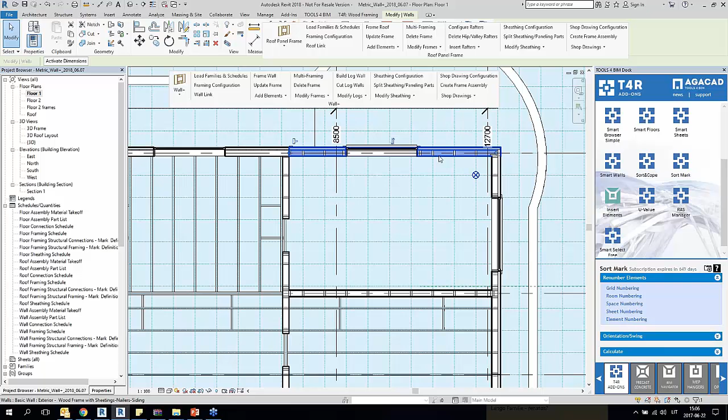Project Base Point handles positioning in a more robust manner than before. In addition to defining the spacing between studs, you also define the same value for the grid spacing, and the function takes care of the rest.

So as you can see right here, I have turned on my work plane visibility, because then it's more clear for me where the studs should be placed, because I can see the grid, and also I have placed my project base point in the intersection of the grid.

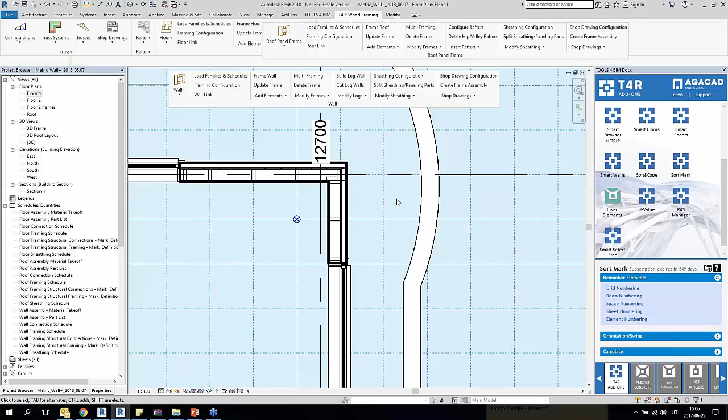Yes, and right now I will show you the configuration for the walls. So right here, as you can see, we have a feature aligned with project base point. So I have it turned off right now.

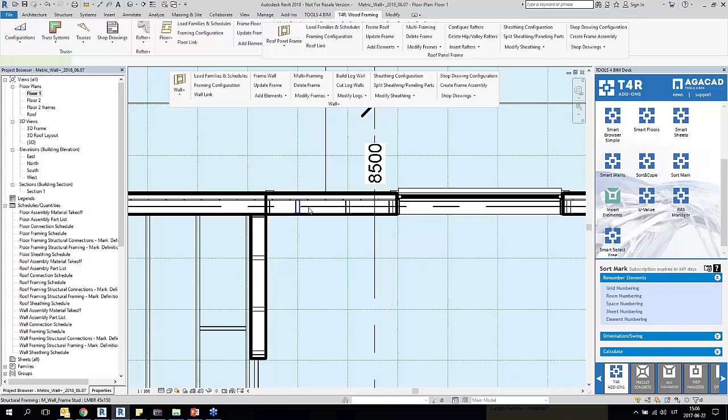So all my wall frames will be aligned by the project base point. The same goes for the floor panels and the roof panels. Yes, so now as you can see, all these framed walls have studs aligned by the project base point in all project.

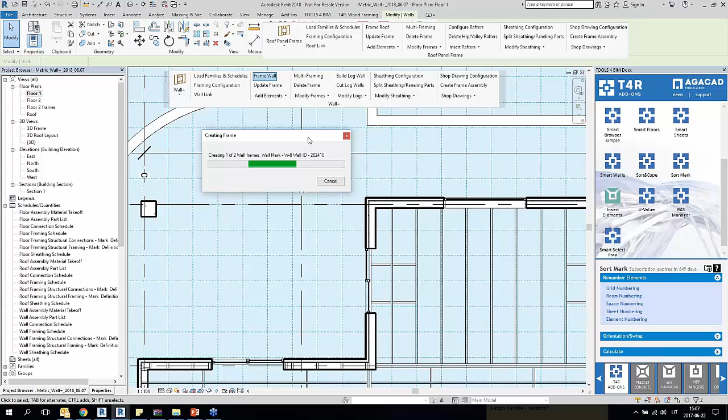So now, for example, I will frame these two walls, and now the tool is adding the main frame by our created configuration, and also you'll see how the studs will be aligned by the project base point.

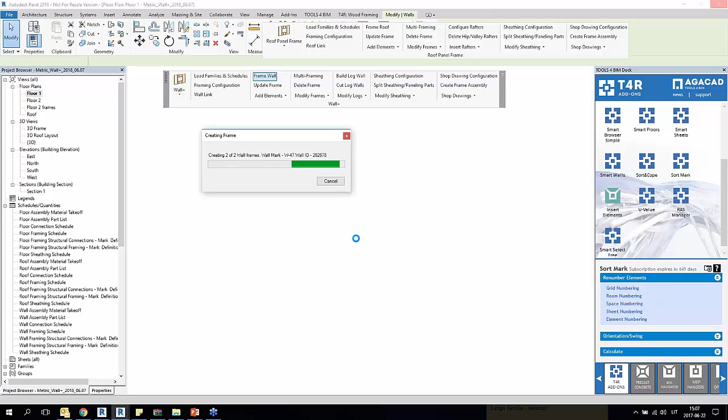Yes, okay, and I can see that the studs are added, and as you can see, all of these studs are aligned by the project base point. And I can just take a look at the 3D view as well.

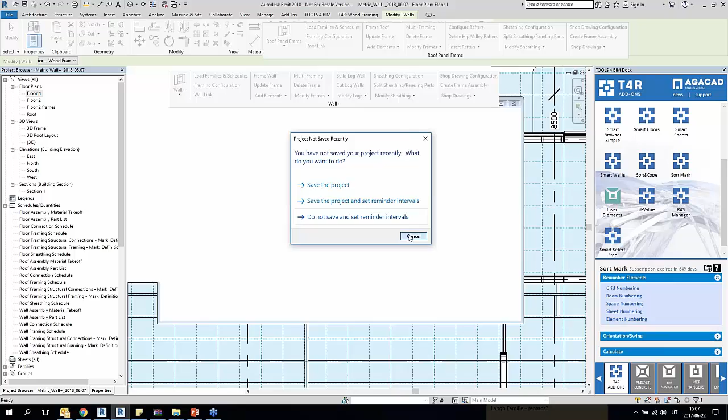Yes, and I just framed these two walls. I added the main frame, and everything is correct.

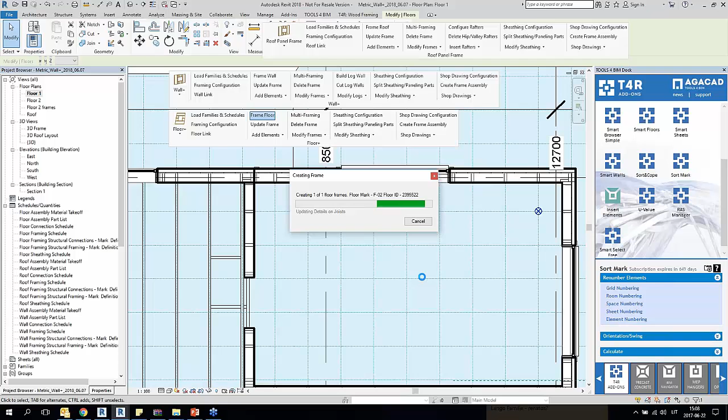Also, I can do the same for my floors. So I will take my floor framing tool, and for example, I will select this floor panel and I will frame it, and you will see how the floor joists will be aligned by the project base point as well. And yeah, they're aligned, and all other walls in my project are aligned as well.

And the same goes for the roof. Yes, I have one empty panel of my roof right here, but before framing this roof panel, I want to mention that this roof was split using our tool, roof panel layout. Yes, here is a 3D view created for that.

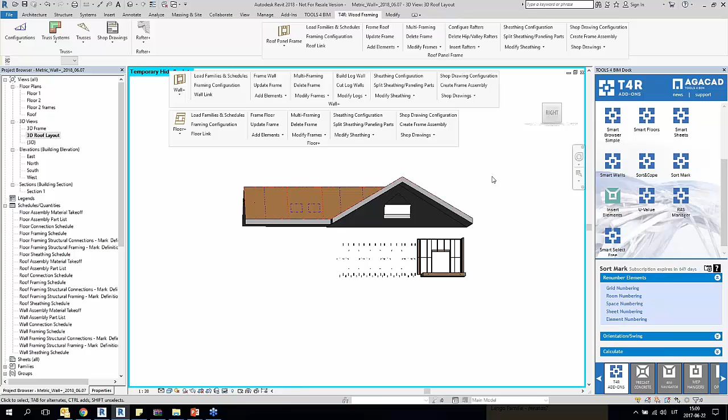I will isolate these elements. Roof panel layout automatically generates panel layout planning for any architectural roof. It uses predefined rules to draw symbolic lines indicating the future panels, and then it creates real roof panels. These roof panels can later be framed using the wood framing prefabricated roof tool.

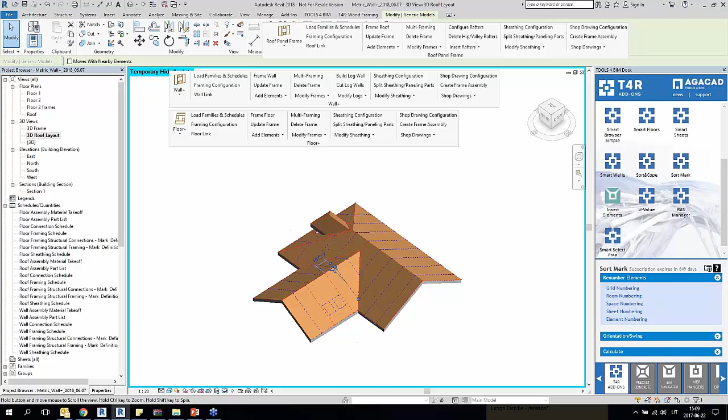So now I will go to my frame view, and as you can see, this roof was split into actual roof panels by roof panel layout, and now we can frame these panels. So I will take my roof panel frame tool, and I will frame this roof panel, and you'll be able to see that the joists will be also aligned with the project base point.

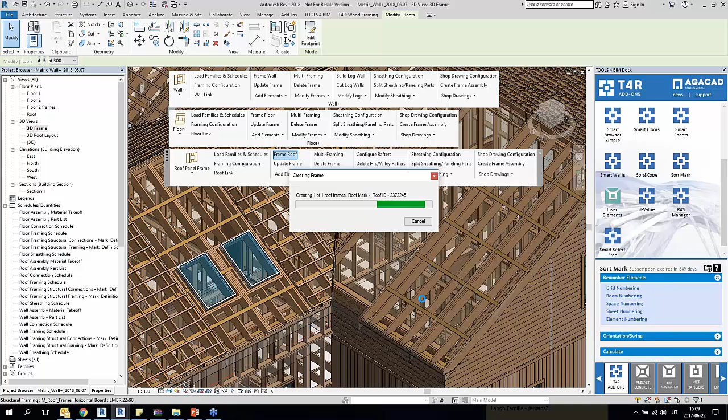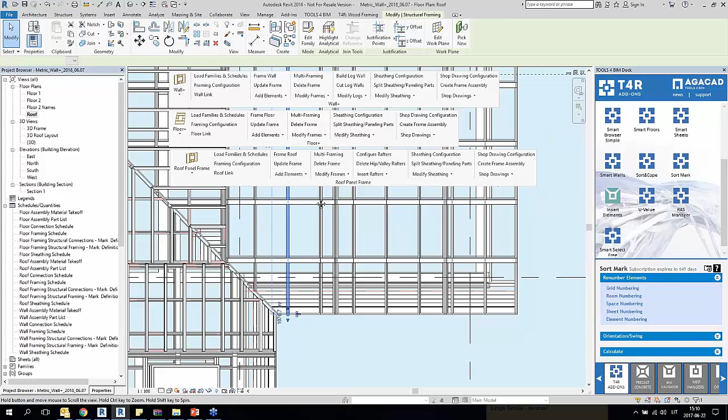Okay, my roof panel was framed, and I will go to the roof plan view, and this is the panel that I've just framed. As you can see, the joists are aligned with the project base point, as well as all other roof joists that have been framed previously - all of them are aligned with the project base point.

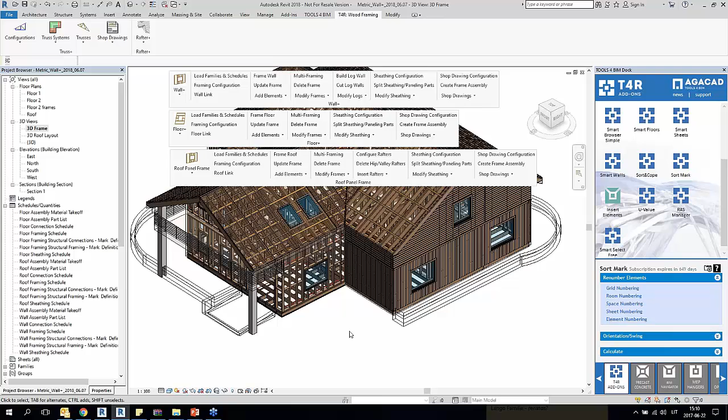I will go back to my 3D view, and let's talk about custom headers now, sill plates and top plate supports.

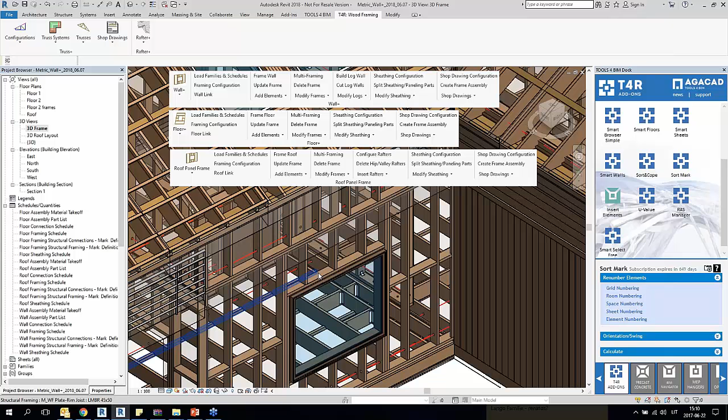Previously, you had to choose from our pre-created headers. But from now on, you can create any type of header, sill, or top plate support and save it under its own name for future projects. Your custom configurations can also be shared with your colleagues. So now, let's take a look at those configurations.

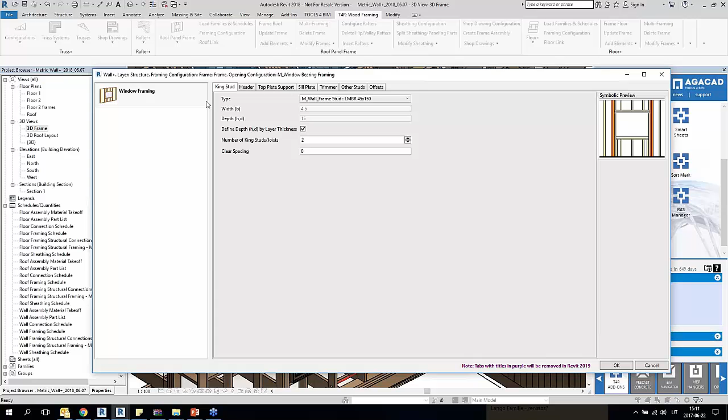I will go to modify frames and go to modify opening framing, and I will modify a header above this opening. So I can see right here that I can choose from the most popular types that have already been created - they come together with the software - but from now on you can create your own.

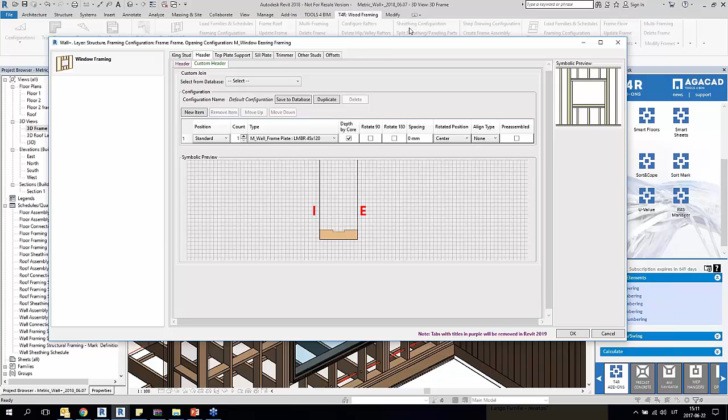You have to choose custom header type right here and then go to the custom header tab. And right here you can create your own configurations, save it with your own name, and use them later as well. So let's say that I want to modify this header, and yeah, this dialog conveniently lets you predefine each plate type and its position.

A plate can be rotated by 90 or 180 degrees and added to the external, internal, or middle wall layer. Additionally, there is a feature which allows a plate to be aligned with the previous element, but we cannot see it right here, so I'll just, for example, turn on some kind of default configuration.

Yes, so for example, this plate, as you can see, we can align it to the previous element, end, or start. You may select a specific type with predefined sizes from the project, or you may define the depth by the layer thickness. Your predefined scheme can be seen in the symbolic preview.

So for example, now I will try to create a new header type from this default configuration that again comes together with the software. So I will duplicate it and I will create my own unique name - for example, default configuration - and I will add, let's say, 5 elements.

So I will just name it 5 for now. Okay, and now let's say I will add 2 of these elements. Yes, I will not change anything at all right here.

And for this one, yes, I will add a new item, and I will say that its depth should be defined by the core. Also, I want to rotate it by 90 degrees and 180 degrees. I want to add it to the external side of the wall, and also I do not want to align it to the previous element's end.

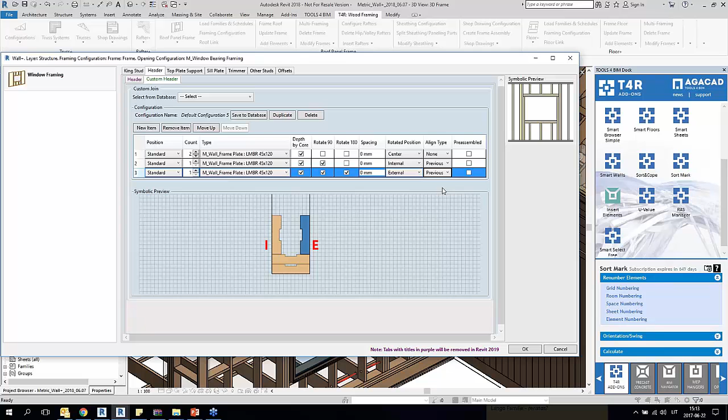Yes, I want to align it to the previous element start, so I will select this one, and I will add another element. Yes, again, I will define it by the core, and I will rotate it by 180 degrees, and that's about it. I'm happy with my header.

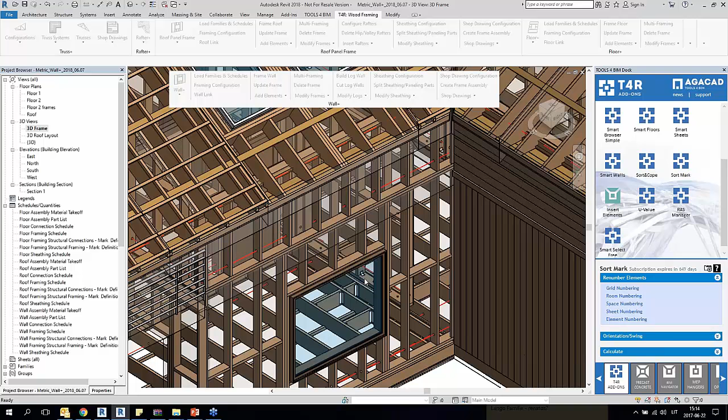I will save it. Okay, and I will use it, and now the software is updating this header above this opening, and I can see that the header was created. Yes, and my custom header type was added.

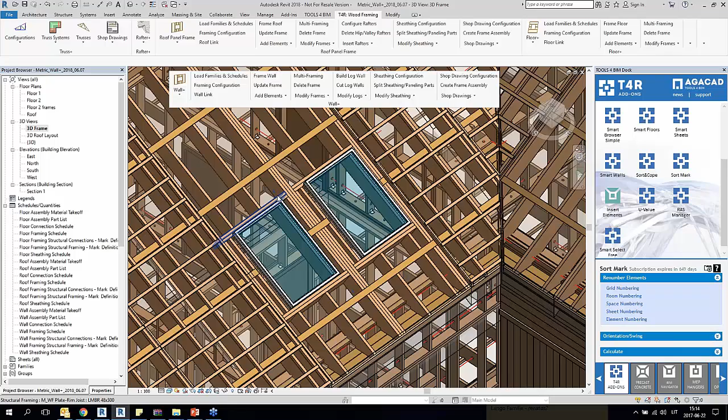And the same goes for the floor or roof openings, headers, sill plates, and top plate support. So for example, again, I can modify a header above a roof opening. So again, I will go to modify opening framing.

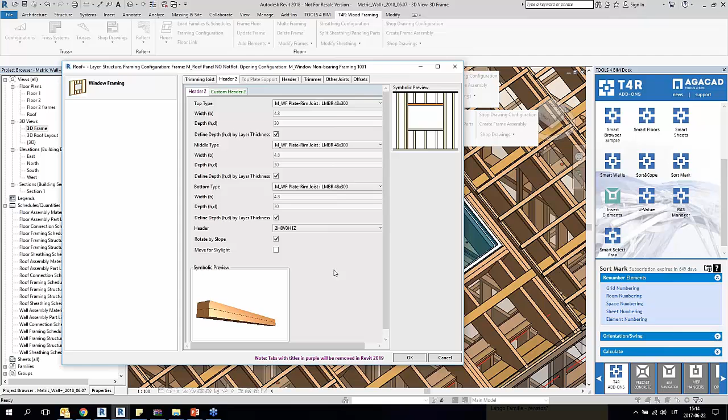Yes, I will click on this header, go to the header 2, second header, and also I will choose custom header type, go to my custom header type. I will turn on the default configuration for a quick start.

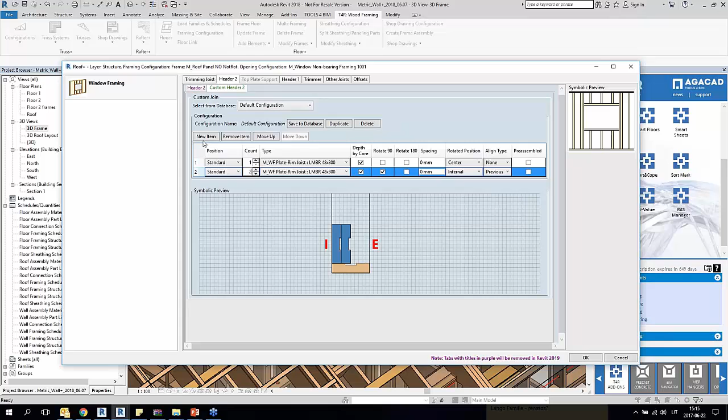I will add 2 of these elements, and I will add another element. I will define it by the core. I will rotate it by 180 degrees, and let's say that's it. Let's say I'm happy with my header. So I will hit OK, and the tool will update the header above this opening.

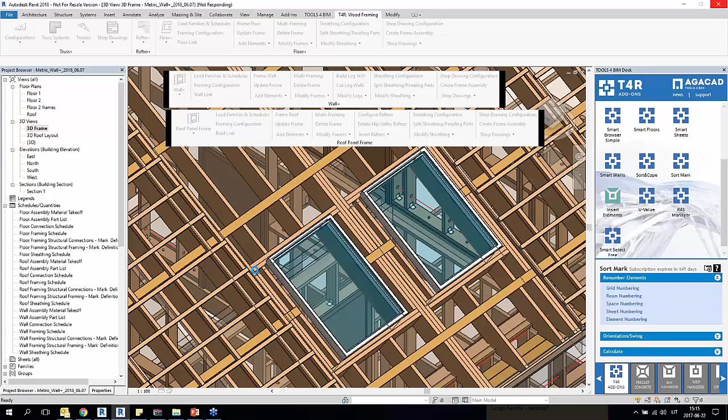And as you can see, the header was updated. It's very easy. Okay, and also more flexible options to control additional bridging, nogging, and blocking have been added.

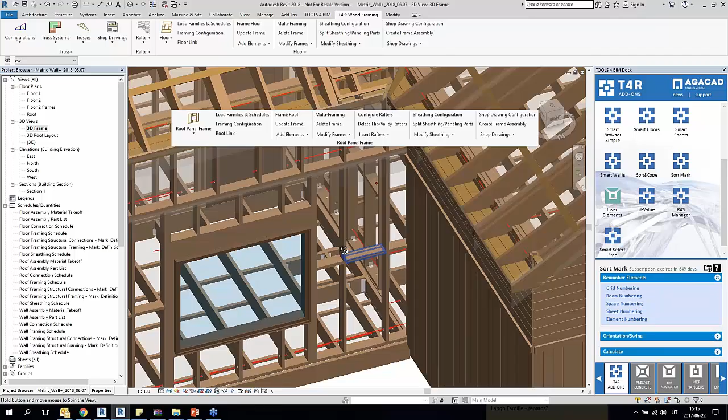So now you can predefine an offset from the selected element or a connected element. For example, I will add additional elements from the shorter connected elements end, and I will use add additional bridging, nogging, and blocking. I will select this element and this element.

Okay, and let's say I will add from the shorter connected elements end, I will offset from the top by 400, and the second element will be offset by 800. Yes, and I will add 2 elements, and that's about it.

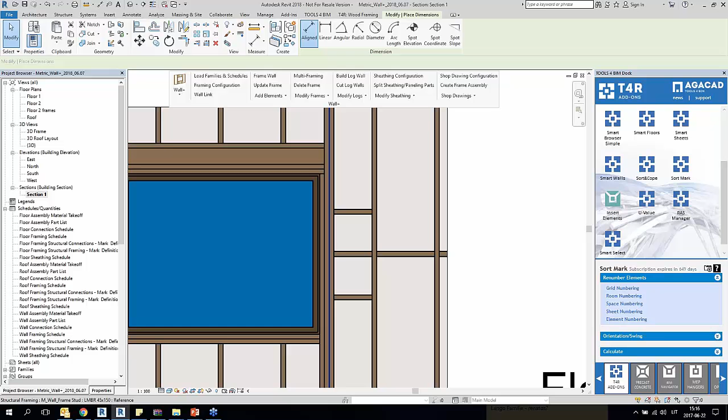Okay, and now the tool is adding the additional bridging, nogging, and blocking by my selected rules. Okay, and I can see that it was added. And also I created a section view for this wall, so we could see it better. Yes, and these are my additional elements that I've just added, and I can check that. Yes, I can see. Yes.

From this element top—no, from the first element top. Yeah, 400, and from the second one it's 800. So they were added by my created rules. I will turn on the continuous style. Yes, 400 and 800.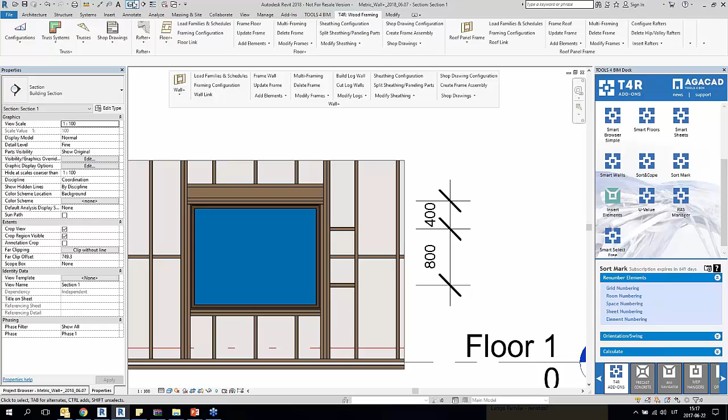I will go back to the 3D view, and of course additional elements can also be added for the floor and for the roof. Okay, now let's talk about the details.

From now on, rules for details are separate from the frame configuration, giving you much more flexibility. Previously, you had to predefine detail distribution rules for each and every frame configuration one by one, even if they were identical. Also, you couldn't make multiple detail configurations for one wall type, and luckily that has now changed.

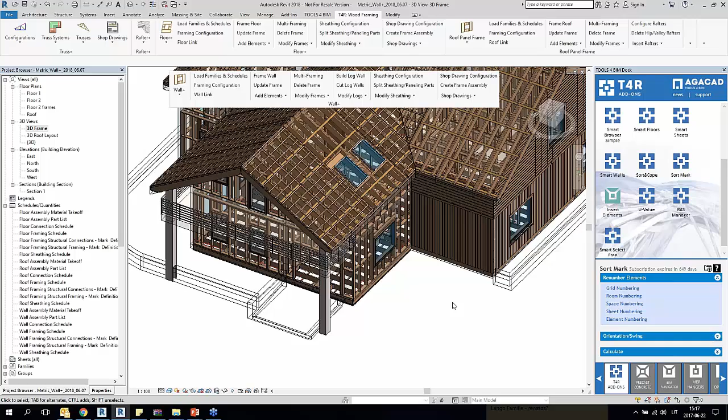So let's take a look at the configurations. From now on, they can be found in Add Elements, Details, Configurations. So from now on, these configurations are right here, and the best workflow is to add them later after you frame the wall.

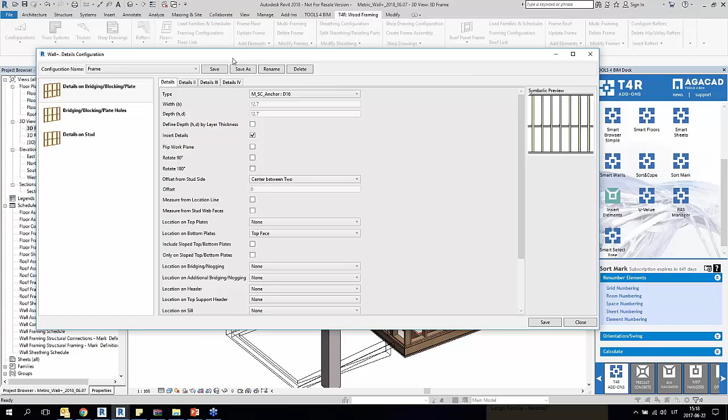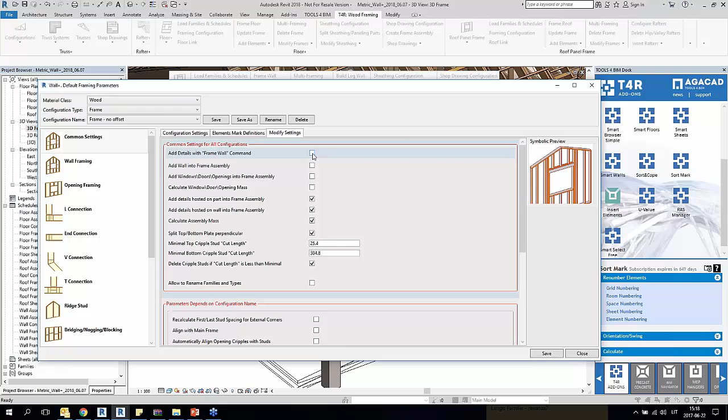But of course, if you want to add the details when you frame the wall, like before, in the framing configuration, in the modify settings, you have to turn on this tick mark, add details with frame wall command, so it's still possible, and the tool will choose the detail configuration that name is identical to the framing configuration name. So if you want to add it, you can still add it when you frame the wall, but we recommend to add them later.

So now I will add the details. So let's say that for this wall type, I have 2 identical wall types, but for this wall, in the first floor, I want to add details by one configuration, and for this wall, I want to add details by another configuration. So I will use...

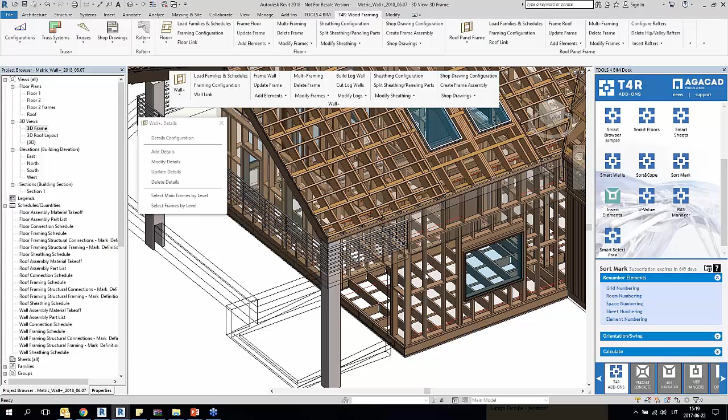So I will use command add details. I will select this frame. Yes, and I will use this configuration that I've created for this frame.

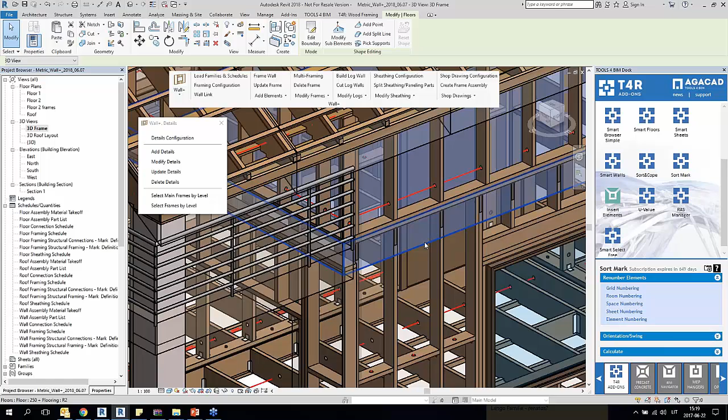Yes, but you know what? I just noticed that I haven't added an offset for this frame. Modify wall framing - I will just take a look. Yes, modify settings.

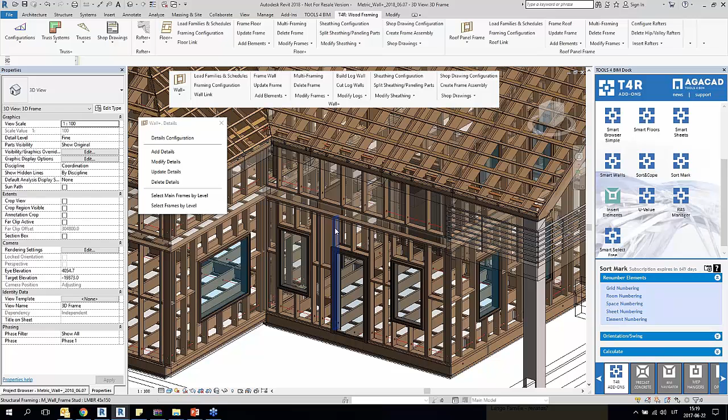Maybe I will add it to this wall right now. So I will add details by this configuration.

Yes, I created different configurations for top plate details, and I used Simpson details for this example. So these details were added to this wall, and I will add a different detail configuration for my wall on the second floor. As you can see, different details were added.

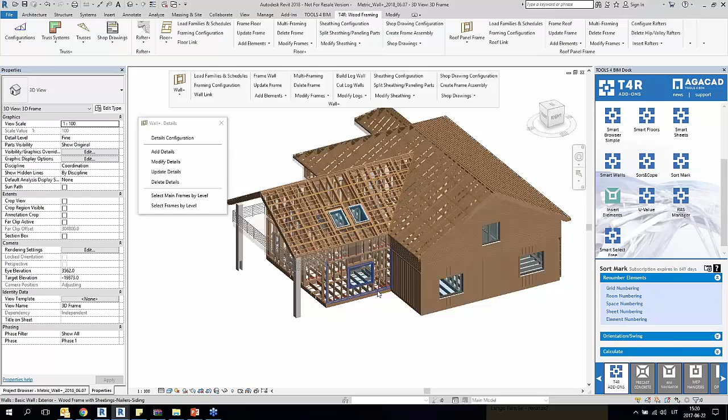Okay, and now I can add additional layers to my wall. So we can add secondary frame, we can add nailers, siding, or we can just add all additional layers at one time. But for now, I will just add them one by one. So I will add the nailers to this wall.

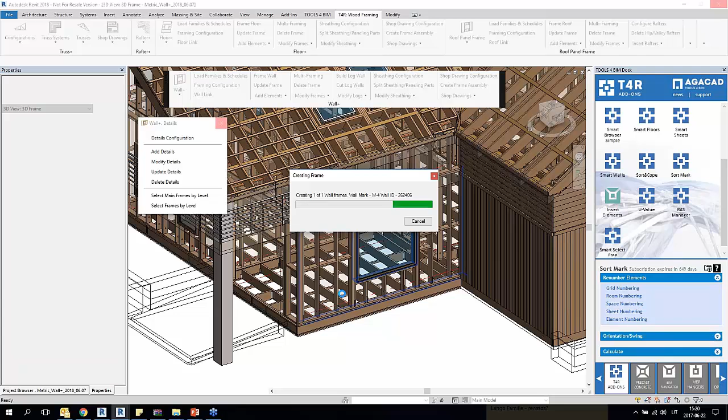Yes, and now the tool is adding horizontal nailers by the configuration. The horizontal nailers are added, and also I will split the sheathing and paneling parts.

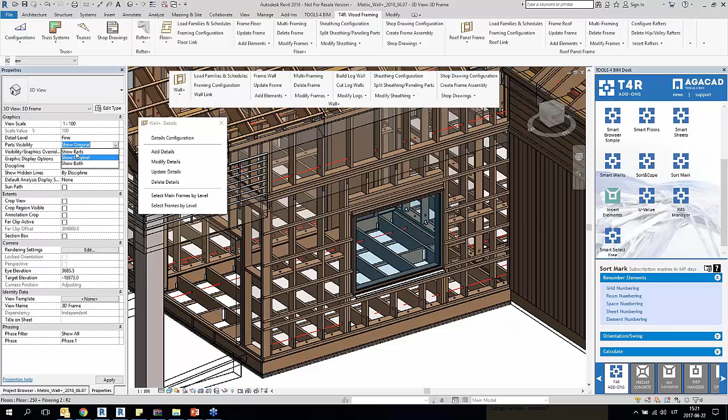In order to see the sheathing, I will have to turn on the Show Parts view in Revit, because sheathing is created as Revit parts. Yes, and I can see the sheathing was split in my wall panel.

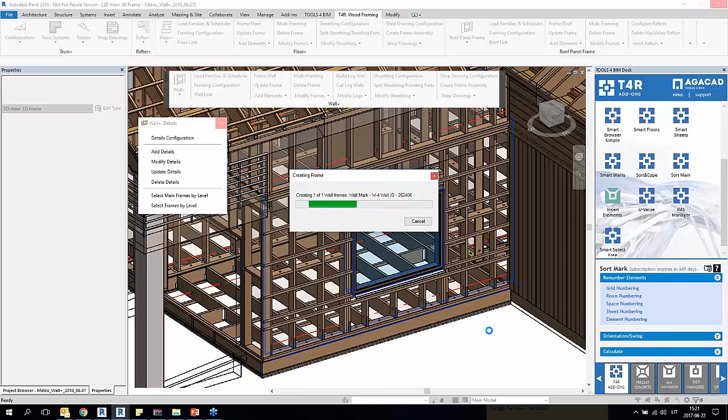So I will go back to the original view now, and I will, let's say, add the siding. Okay, the tool is adding the siding, and then I will sort those structural framing elements.

I will use the function Sort Structural Framing by Wall Mark, and all of those marks will be written in the framing members families.

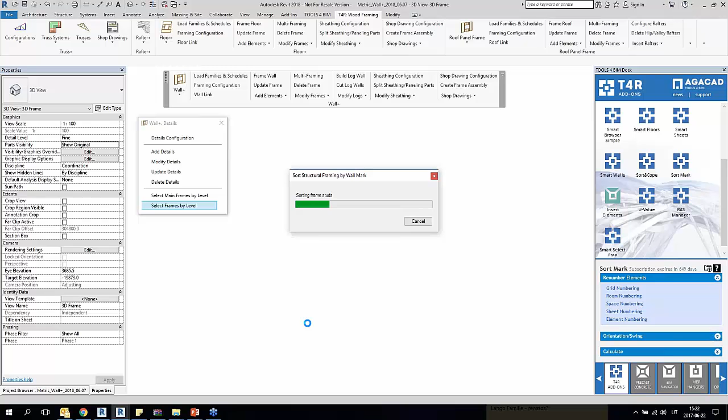Okay, so I can, for example, select this element, and I can see that it was marked automatically. Okay.

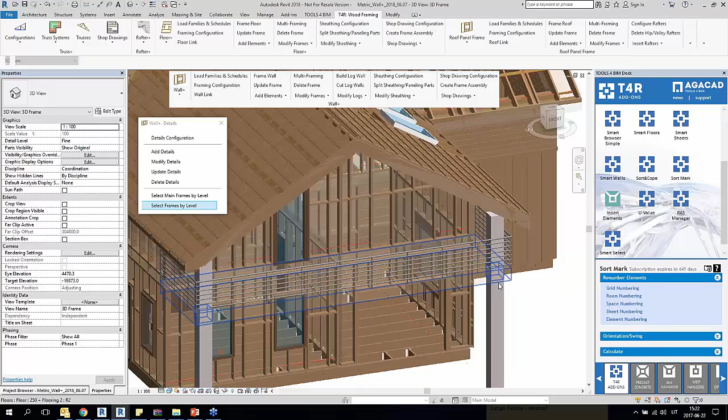And now we can start to create shop drawings. New features for creating shop drawings were also added to the new framing software. Shop drawings are created automatically by predefined rules in the shop drawing configuration. So I will go to the shop drawing configuration. And this is my configuration.

An option to insert a gravity point was added to the wood framing software. You just have to tick the insert gravity point mark right here, and also you can check in which views the gravity point will be visible. In this example, I checked the elevation frame front view and the detail view's frame front view. So we will be able to see the gravity point when we create the assembly.

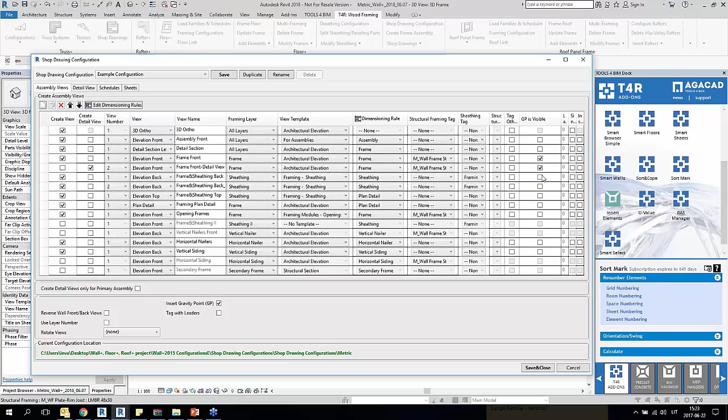Another feature, view number, was added to the new framing software, so finally we'll be able to create several identical assembly views. That means you can use the same view template for, let's say, 2 frame front views

or sections, and then add different dimensions to them. In the past, the views had to be different, so you had to, for example, duplicate view templates in order for them to have distinct names. Thanks to the view number column, however, views can be identical - all you need to do is number them.

So for this example, I created two elevation back views that are identical, and 2 elevation front views, but in this elevation front view, one is also the detail view. For the elevation back views, these 2 views are identical completely, except that I will use a different dimensioning rule - for one I will use the sheathing rule, and for the other the frame dimensioning rule.

And also we can create detail views. When laying out shop drawings, users can now display not only simple assembly views but can create detail views of an assembly. With a simple assembly view, you can see only the assembly itself in isolation from other parts it interacts with. Detail views let you see how a given assembly relates to walls, floors, elevations, grids, etc.

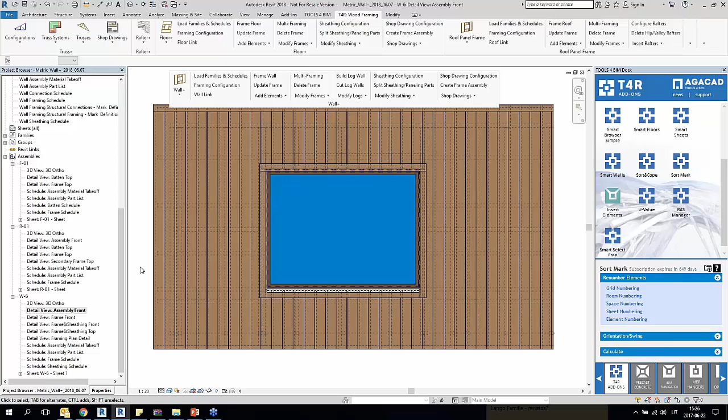From now on, you'll also be able to add customizable complex dimensions with completely new dimensioning technology: smart dimensions. Although in the past you could also add dimensions to shop drawings automatically, with new smart dimensions technology you can configure them from the simplest variations, where dimensions will be added only to a predefined layer, to more complex variations where all layers will be dimensioned.

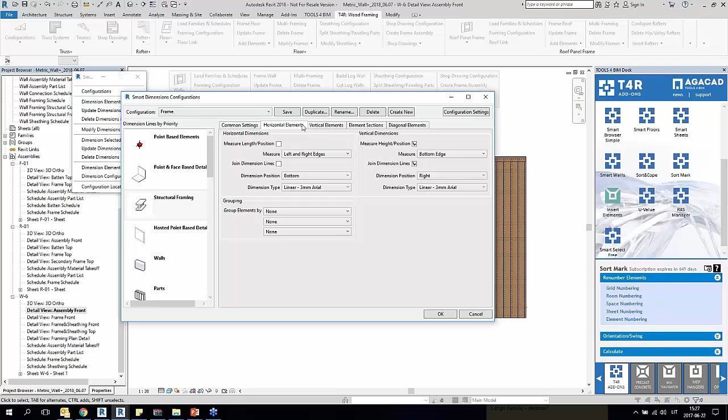With smart dimensions, you'll be able to automatically dimension structural framing elements, point-based elements, parts, columns, walls, floors, grids, ducts, pipes, and much more. All you have to do is predefine the rules in the configuration, which can be saved and used in later projects. Here I have configurations for structural framing elements - this is the frame configuration for horizontal, vertical elements, and so on.

I just opened a wall assembly view, and the whole process is straightforward and user-friendly, as you don't have to set all dimensioning rules in the configuration and create the assembly in order to see the final result. Instead, you can use dimension elements in view function, and the dimensions will be added by chosen configuration.

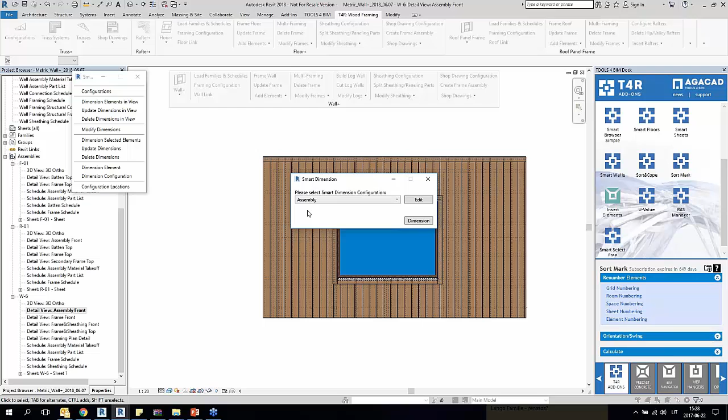So for example, here I will add assembly configuration. I will dimension it, and then if you feel the need to make any changes, just use modify dimensions. Do this until you reach the desired result, and all future views will be dimensioned according to your modified configuration, as all changes are saved.

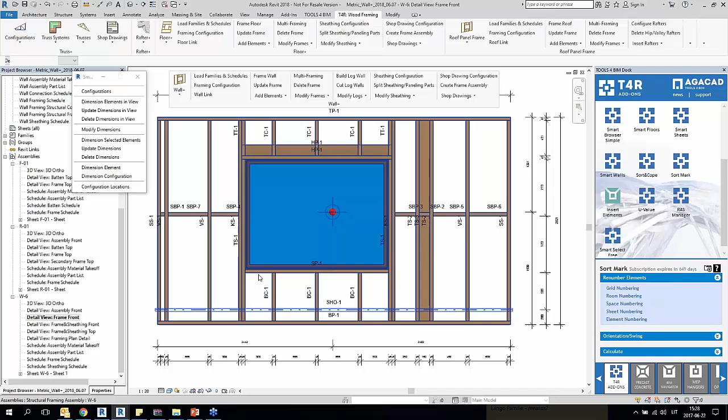Now I will go to the frame front view. I will delete these dimensions in view, and I can dimension these elements in view, choosing configuration frame, for example, and dimension this view. Again, I can modify it right now.

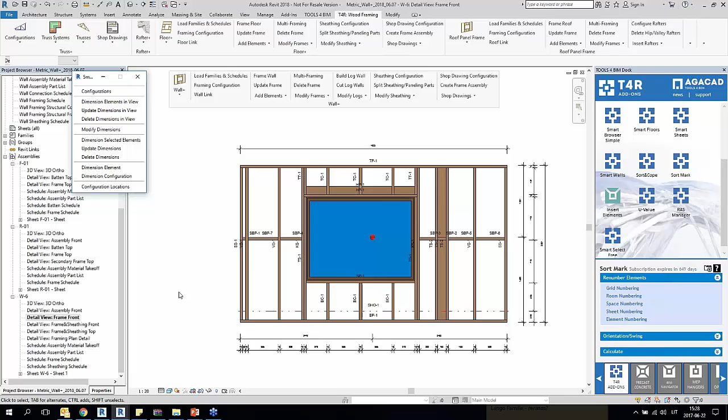But for now I will go to the frame and sheathing front view, and let's say I will also dimension these elements, and this time I will use sheathing configuration. And the view will be dimensioned by this configuration - as you can see, it's dimensioned.

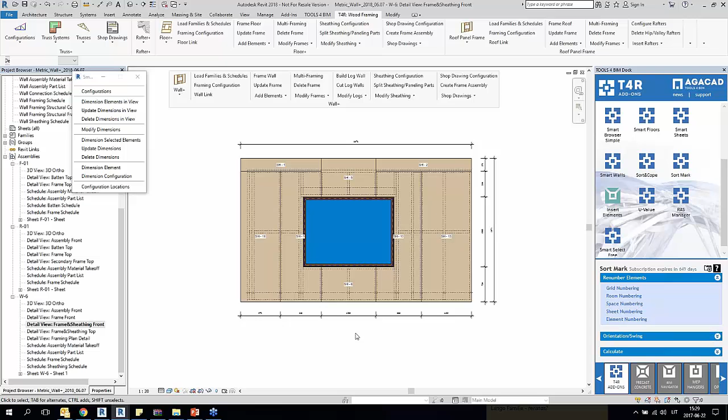Okay, so now let's say that I've modified my dimensions and I want to create a new assembly with these modified dimensions. So in the shop drawing configuration, I have to set these rules. Here we have a column with dimensioning rule, and here I have to set the rule.

So for these two identical walls that I've created, using different view numbers, I will use sheathing for one of them, and for the other one, I will use frame. I will save and close it.

So now all our views will be dimensioned automatically. Instead, I don't have to go through every view and click on dimension elements in view. And I will create these walls that we have just framed, the assembly.

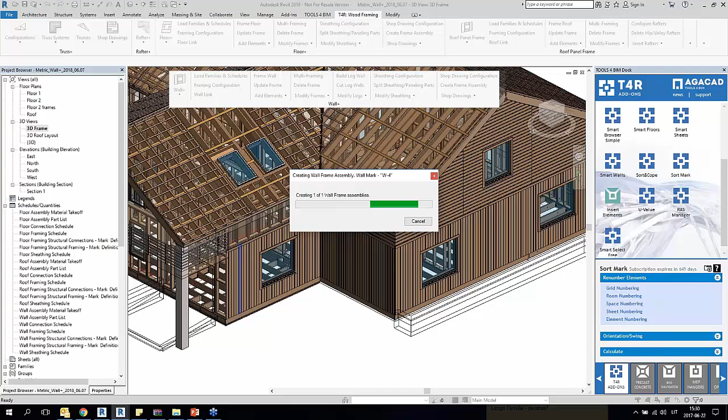And now the tool is creating all those views, and it's also adding the dimensioning rules, it's also adding the gravity point, and it's also creating the detail view, and we'll be able to see that in a few seconds.

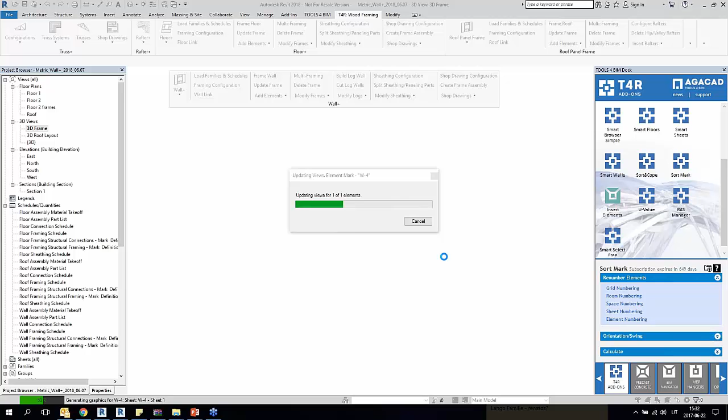And as I can see, the assembly is finally created, and this is assembly number 4. So we'll take a look at these views. We have a 3D view created. We have the assembly front view, and also it's dimensioned with the assembly rule automatically.

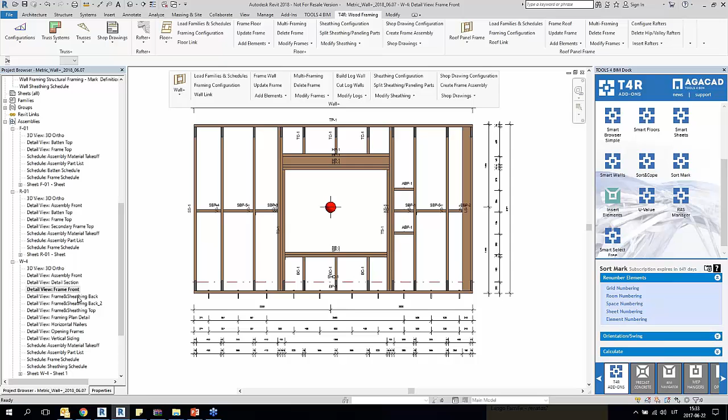Also we have a section view, the frame front view, and as you can see, the gravity point was added to this wall automatically, and also all framing members are marked automatically and dimensioned. And here we have a frame and sheathing back view, and here, as you can see, the sheathing dimensioning rule was used, as all sheathing is dimensioned.

But I have an identical view where I dimensioned the framing elements.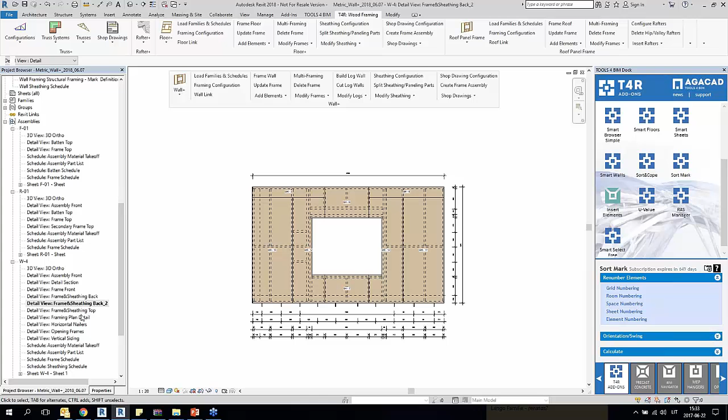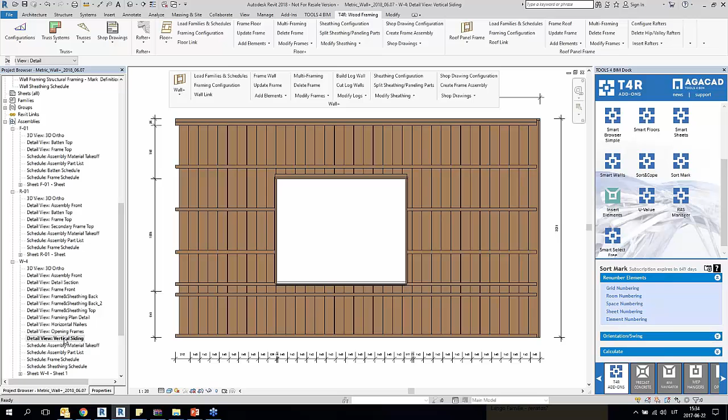That is thanks to the view number column. Here I have the frame and sheathing top view, framing plan detail, also the view with the horizontal nailers, and I have a view with the sub-assembly because I used the opening view template for this view. Also I have the view with the vertical siding. This is the material takeoff, the assembly part list, the frame schedule, and the sheathing schedule.

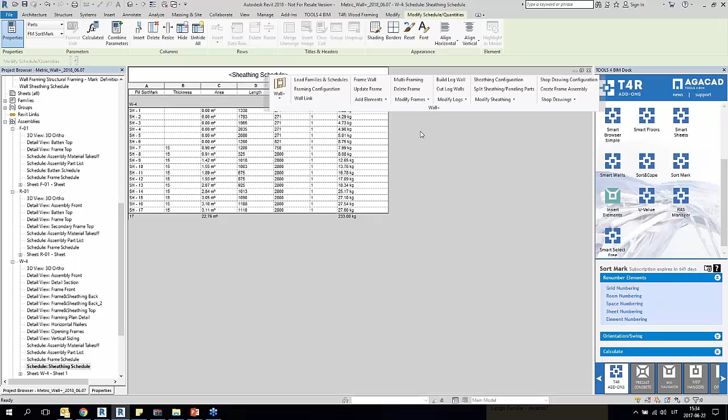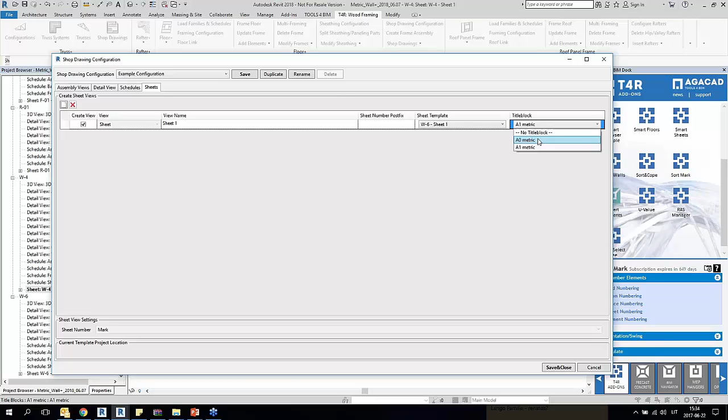Also in the shop drawing configuration, we could have set the sheet template. Yes, that's not correct, let's see why. I have this sheet template, but right here I can see that the title block is too small. Why do we have this situation? I don't know right now. Yes, because of this I made a mistake. Sorry about that, but I don't want to waste your time creating the whole configuration from scratch right now. Let's just imagine that it should be like that. I made a mistake, I'm sorry.

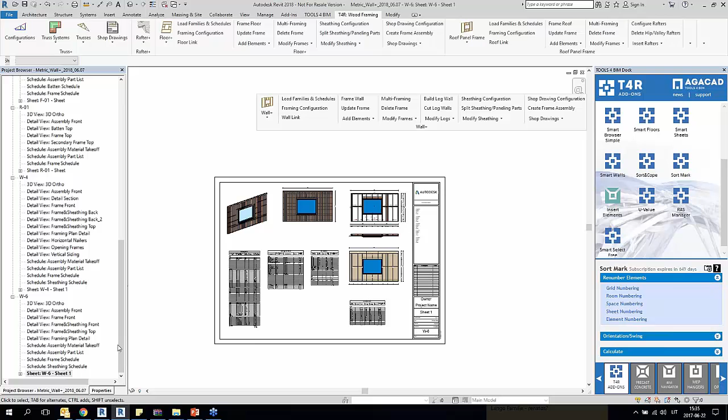So the tool creates the layout of the title block according to the template sheet that we set. I said that this will be the template sheet, and the tool created the same layout, as you can see, and also it dimensioned all these frames automatically.

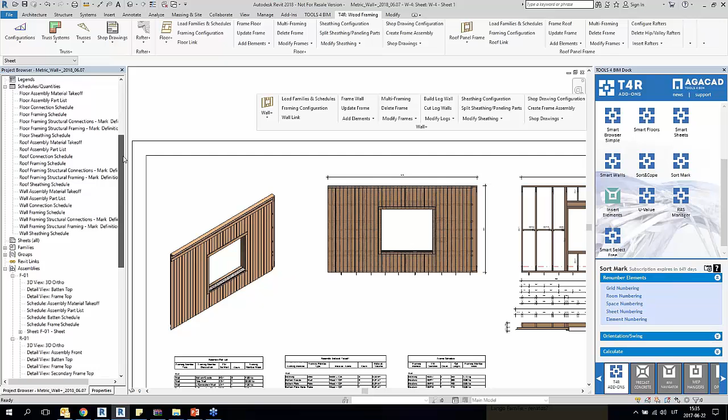I haven't shown you the detail view yet, and this is the detail view. I just have to hide walls from this view, so I will hide the walls, and I can see that I have a frame detail view where I can see the grids, the floors, the other walls, and so on.

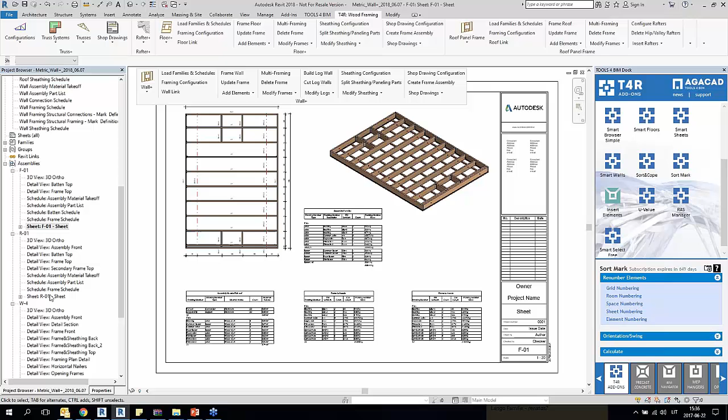Of course, we can create assembly views for the floor. Here I have assembly views of my floor, and I have a sheet of my floor, and we can create assembly views of the roof panels. This is a sheet with a roof panel that I've created.

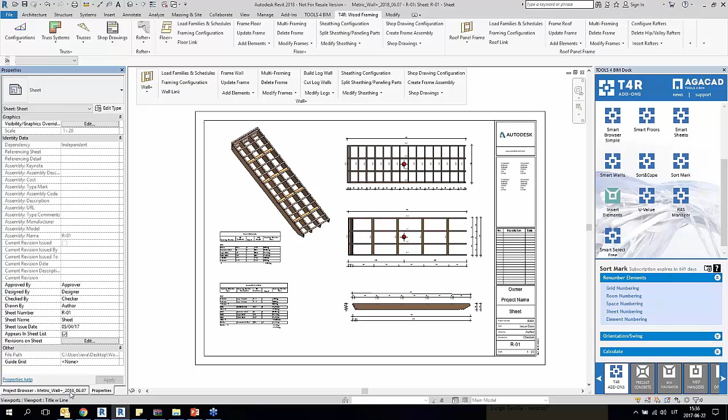Another feature is that we can rotate these panels, and it's extremely helpful for floor or roof panels when in the plan view, let's say, we have a floor. For example, this is floor number 1, floor panel number 1. So this is this panel, and as you can see in the plan view, my floor panel's joists are vertical. But let's say that in the sheet I want them to appear horizontal, I want this panel to be rotated.

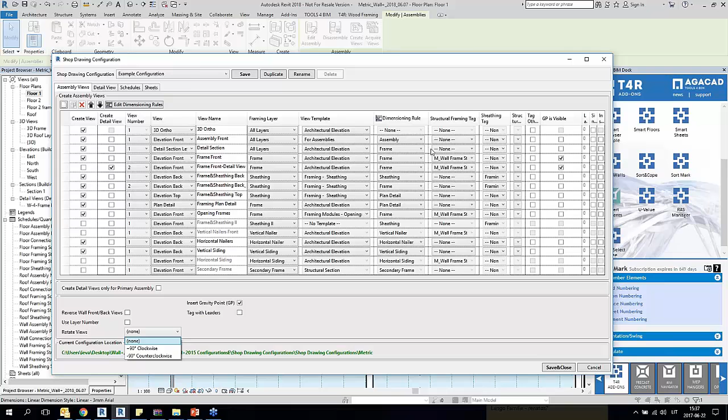So for that, in the shop drawing configuration—oh, I'm sorry, I turned it on for walls, but that doesn't matter, I believe. In the floor configuration it's the same. You just have to rotate it clockwise for the floor panels and counterclockwise for the roof panels, and then they will be rotated. As you can see right here, I have my floor panel with joists placed vertically.

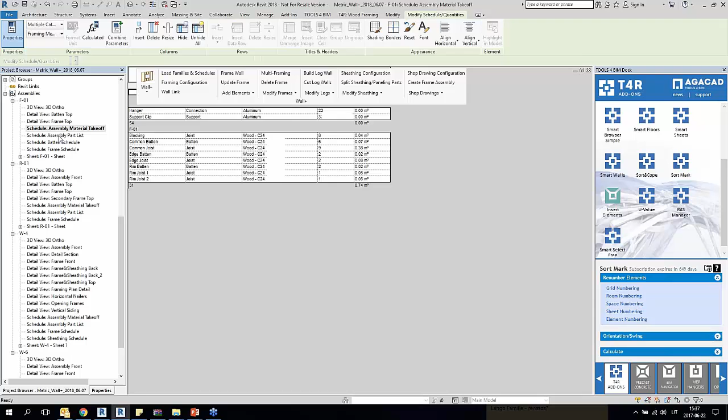But in the assembly view, this panel is rotated, because in the configuration I said that I want it to be rotated, so I can place it in the sheet like so.

As you can see, there's quite a lot of new features in the shop drawing configuration. And that's about it with the live demo.